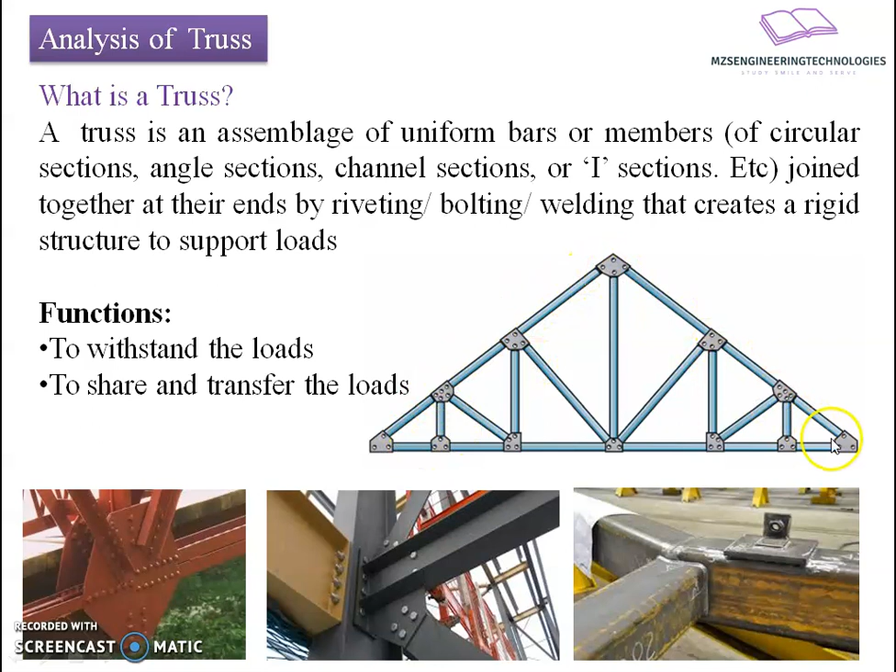Let us find out where we generally find such type of trusses. Such trusses are generally used in case of roofing systems, where we are going to provide a pitch roof for a large span. To cover this large span with the help of flat roofing would become a very heavy structure. To reduce the stresses, we provide pitch elements which have a triangular geometry with various elements.

Performing stress load distribution: we have the bottom chord, then the principal rafter, the vertical member which we call a strut, and inclined members. Sometimes horizontal members are used. This combination is used to dissipate the forces which are coming through the member action over the large span.

These trusses are connected to each other, covering the entire geometry which has to be provided with shelter, and the roof coverings which are provided over it will generate the forces. This force will be the dead force or the wind force which are coming on it. Sometimes live load will also come due to access if provided along the roof.

These trusses are connected to each other with the help of a horizontal member in a transverse direction, thereby providing distribution of the force which comes from the roof system towards the panel points. The junctions of the truss elements are called the panel points, which will receive the loads from the roofing system.

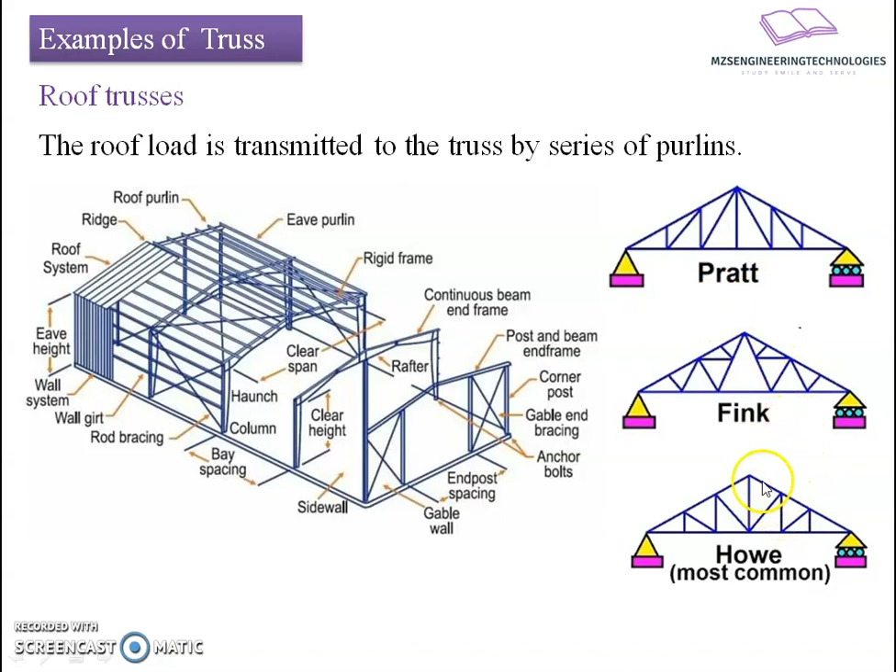The second application of trusses is towards bridges. The load is transmitted by the deck to a series of stringers and then a set of floor beams. In case of bridges, the trusses are used to connect a large span viaduct portion, or overhead portion, or a crossing over the river, or any other obstruction. We are going to provide a spanning in inverted format.

Here the bottom chord will be supporting the deck slab, and this deck slab will be supported by stringers. These stringers are connected at the panel points, and the loads from the deck will be transferred to the stringers, to the floor beam, and floor beam to the truss panel element, or nodal points. This nodal point will then transfer the forces to the various members, and there will be a distribution of forces, thereby making stability of the structure.

These trusses may be used for bridges. It may be used for covering the crossing overheads over the rivers. Sometimes they are used to provide the conduits. Sometimes they are used to prepare a crossing for pipelines, and many more. The example trusses used in bridge structures are Baltimore truss, Pratt truss, and Howe truss.

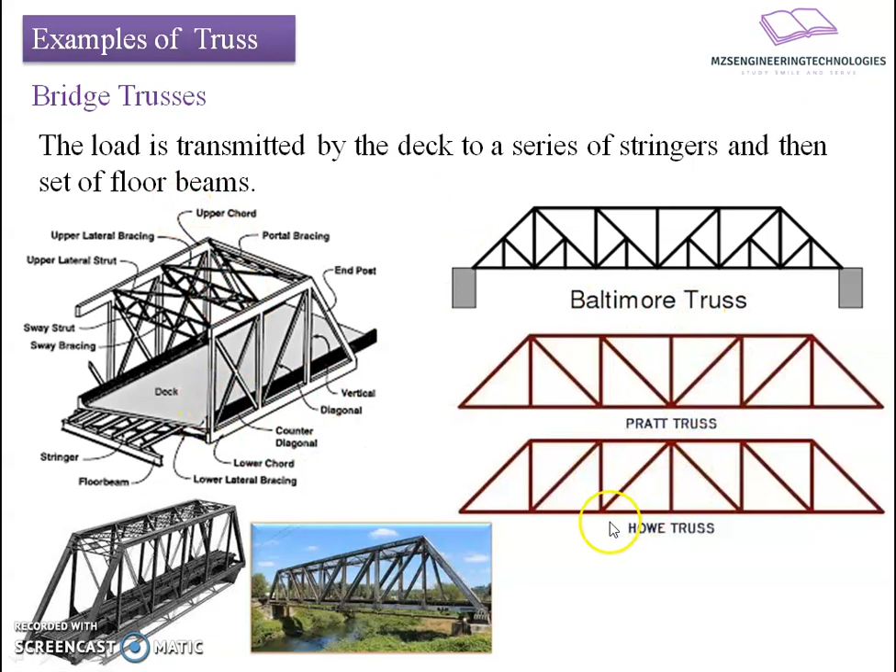Let us try to classify the different types of trusses. Trusses are basically classified into two heads: planar truss and space truss. When the members are within a plane, or the member occupies the space defined by a two-dimensional geometry, I am going to call that a planar truss. When the members are distributed along three dimensions, preparing a three-dimensional structure, we are going to call it a space truss. An example is the electric towers.

If I want to classify the planar trusses further, they are classified as simple truss, compound truss, and complex truss. A simpler geometry defining a simple triangular envelope, thereby creating a skeletal structure, we are going to call a simple truss.

When we use compound elements of triangular geometry covering the area, we are going to call it a compound truss, where one, two, or three triangular groups can be easily identified.

When we have an assemblage which will create a certain nature of complexity in itself, defining n number of loops connected to each other by various end connections or end restraints, then I am going to call it a complex truss.

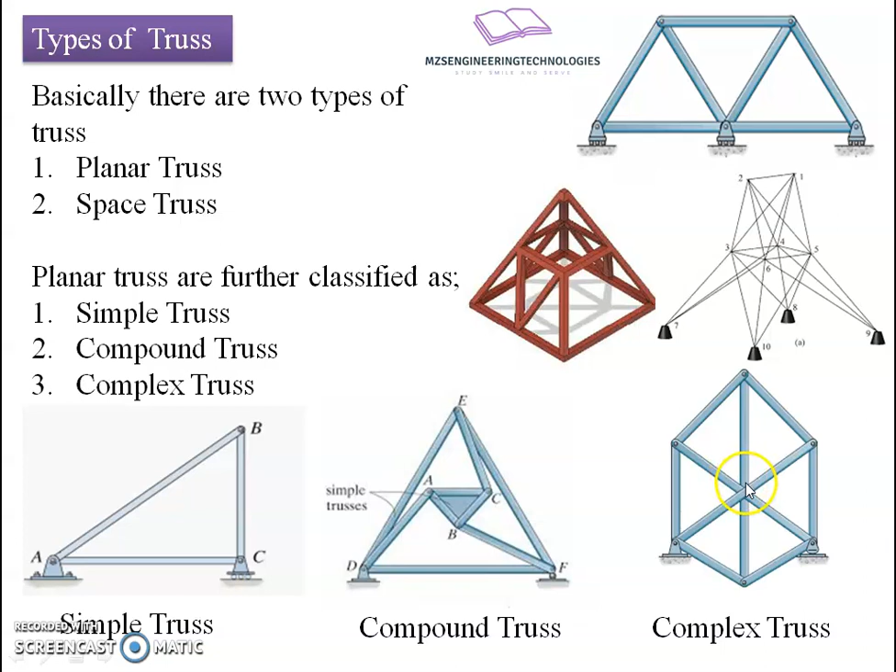The right hand side figure shows that there are n number of loops which have connectivity, defining the loops inside it, but the ends are secured at the outer periphery with the help of pin connections. The crossing or overlapping elements are not defined with any hinge. This leads to a complex geometry, and it is a little bit cumbersome to find out the forces in that particular truss. Such a type of truss is called a complex truss.

Now we'll move towards the basic assumptions used for the analysis of a truss. Before that, we'll talk about what type of connections we generally apply in case of a structure. We provide flexible or pinned connection, semi-rigid connection, or rivet/bolted connection, and rigid or welded connection.

This connection plays an important role to transfer the force from the ends to the member. If flexible connections are there, they will allow translation and rotation. Thereby, the force distribution will only be along the cross-section area of the member, assuring that the forces are axial forces. Whereas in case of semi-rigid connection, they provide resistance against translation or rotation, partial resistance against translation and rotation, thereby introducing additional stresses which are developed due to such a restraint.

In case of rigid connection, this connection will completely clamp down the translation and rotational degrees of freedom for the structure, thereby introducing additional stresses over the member. There may be axial stresses, shear stress, twisting stresses, or bending stresses developed due to twist, or flexural stresses developed due to the flexural forces.

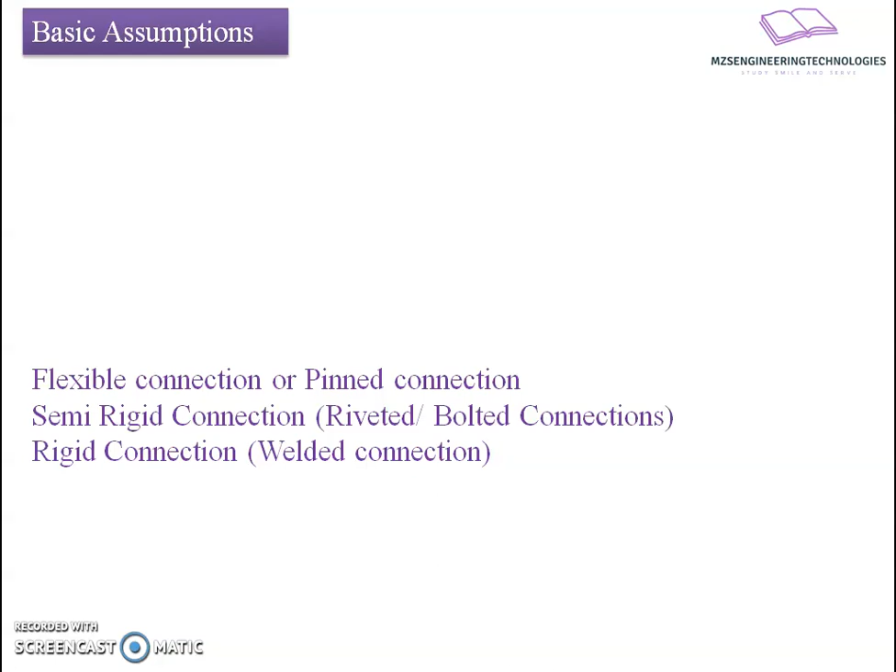In case of truss, the very first assumption is that truss members are connected by smooth pins, so as to ensure that the members are subjected to axial force only. That is the very first assumption.

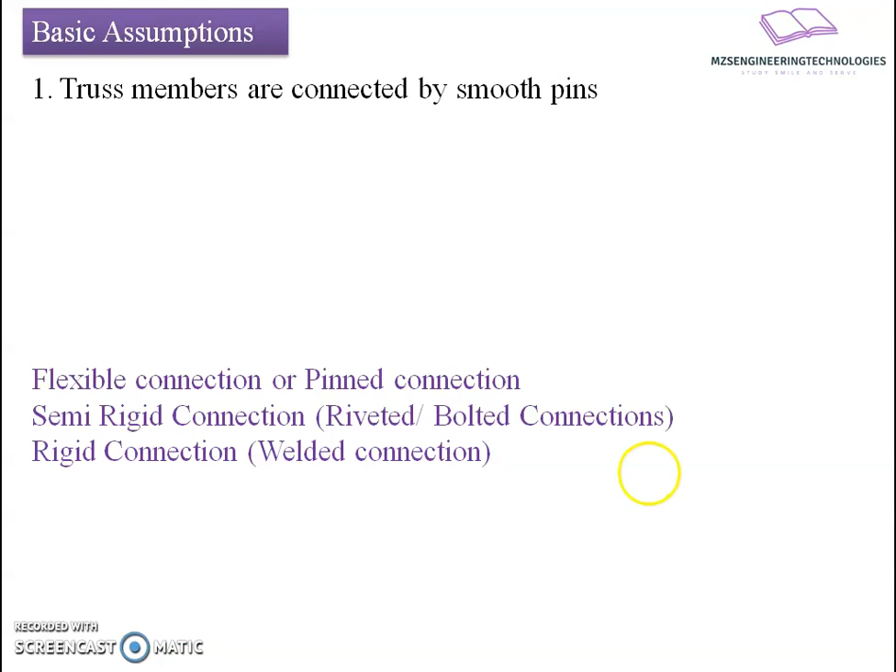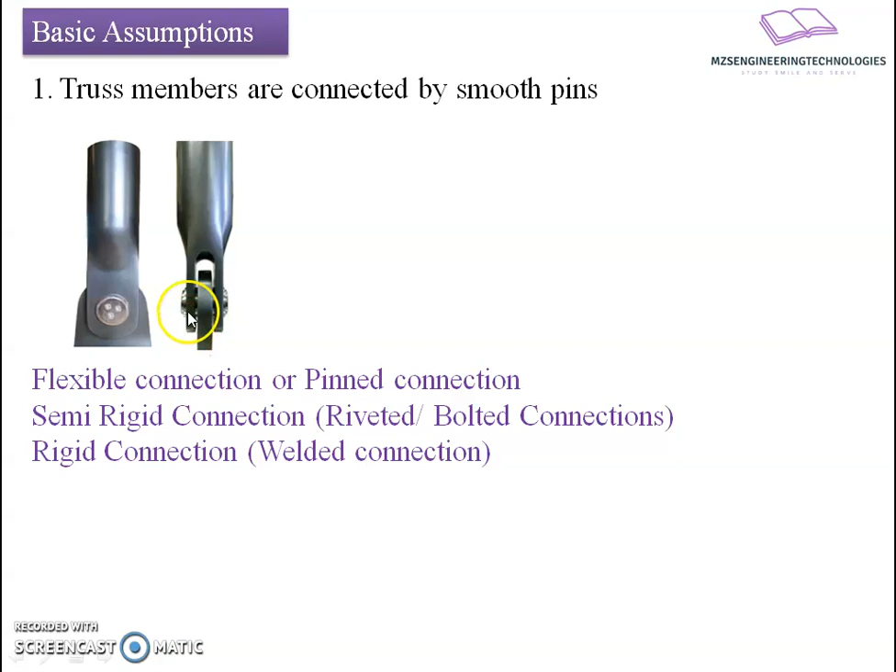What are the pin connections? Let us have a view over it. The pin connections are made with a cylindrical steel metal pin inserted between a connection, which just forms the axis for rotation. It doesn't clamp the moment of the joint. If you see here, the pin is simply inserted between the two elements. This one is the eye end of the member, the second one is the eye end of the connecting plate. Simply the pin is being inserted, and this pin will allow the rotation of the member along its cylindrical axis.

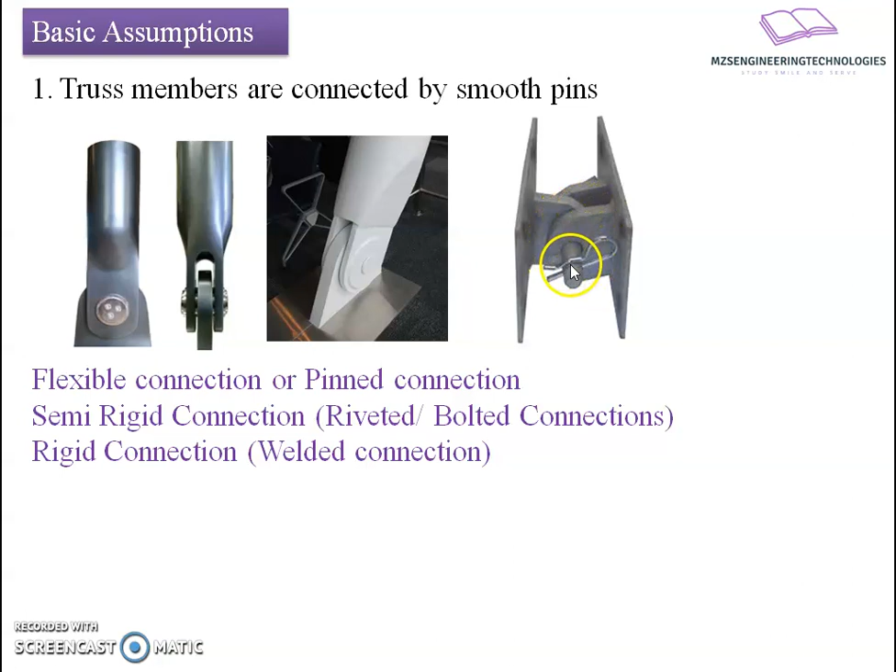If you see the cross section view here, to have conformity that this pin will be secured in the connection, and will not get loosed out or removed, we are going to add a counter locking to this by a pin. This pin will not interfere in the transfer of force, but it will ensure that the pin will not get moved when the connection is in working.

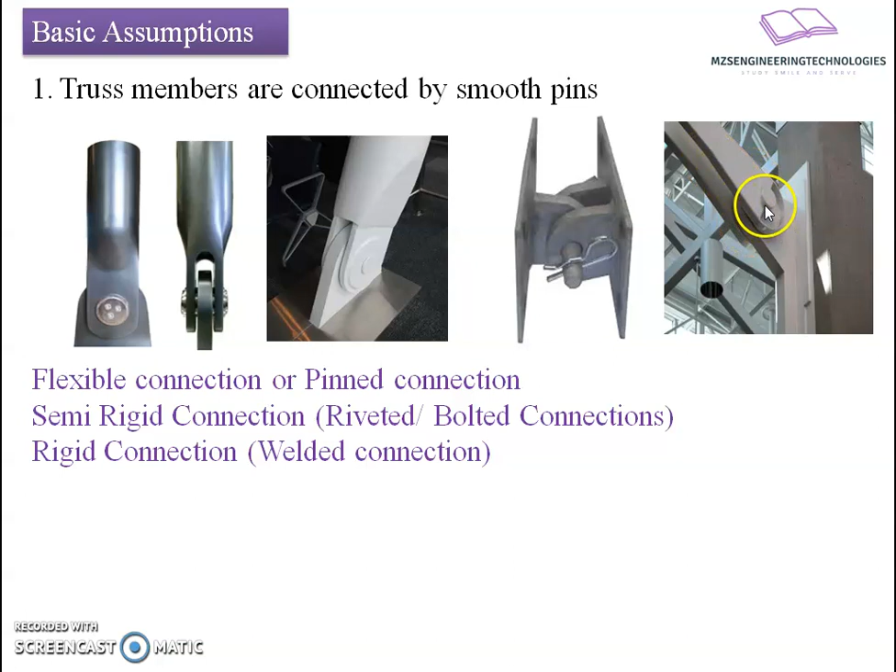This we can see here, the connection made for the actual position of a connection made for a roofing system. Here simply a pin is introduced, which secures that the connection is going to be a flexible one. Now what happens if I provide smooth pins for the connection here? The stresses produced in the element are called primary stresses. These are stresses introduced due to this type of connection.

The assumption is valid for rivet and bolted connections only. Sometimes we can have flexibility with reference to the bolted connection, depending upon what type of clamping force I am going to apply. We have two types of bolted connection here. The first one is the black bolt connection, where we ensure that only the clamping is there and there is no clamping force or resistance developed, like in the case of high friction grip bolts.

In case of welded connections, members are subjected to slight bending moment, producing bending stresses known as secondary stresses. So generally we avoid welded connections in the analysis, or if we consider them, we are going to provide certain provisions related to the bending stresses and their involvement in the analysis of forces.

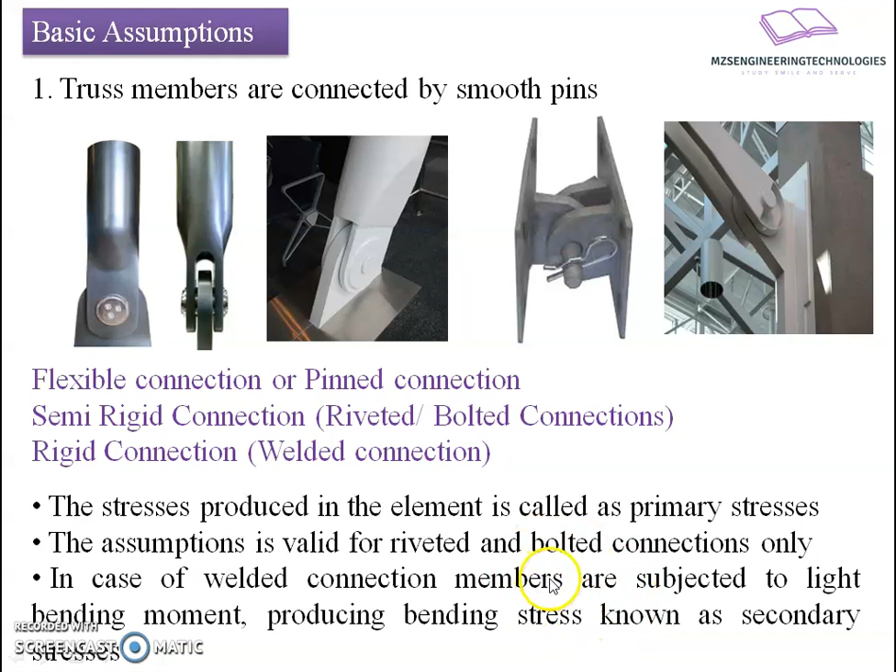Next to that, the members of the trusses are straight members and loads are applied at the joints. Here members are stressed between the two points, and the load carrying capacity depends upon its slenderness. If it has an initial crookedness or slenderness, it will definitely impact the load carrying capacity. Thereby we have to assure that members are straight and the loads are applied at the joints only.

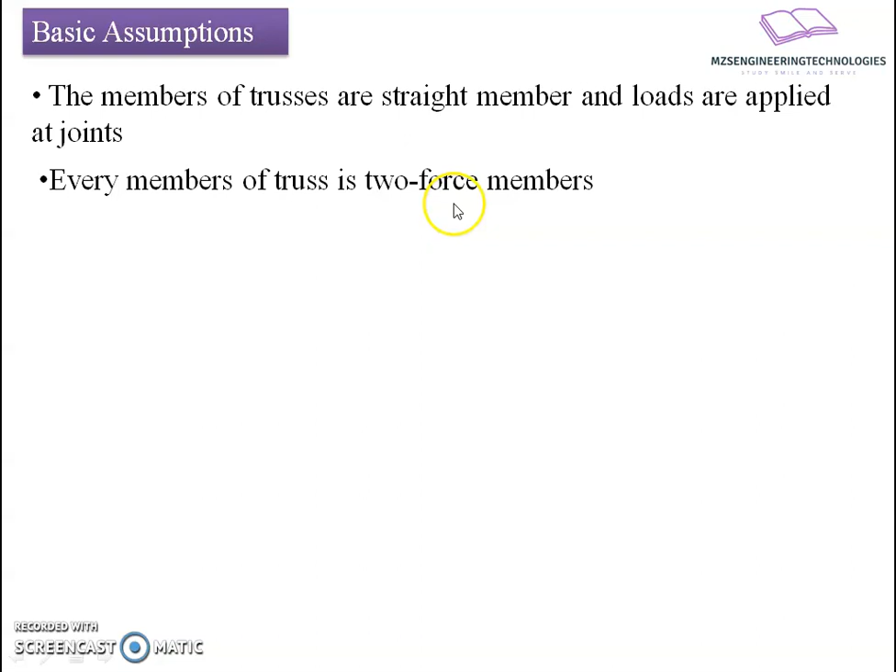Every member of the truss is a two force member. This is a very important one. Two force member means the member of the truss will have a dual action.

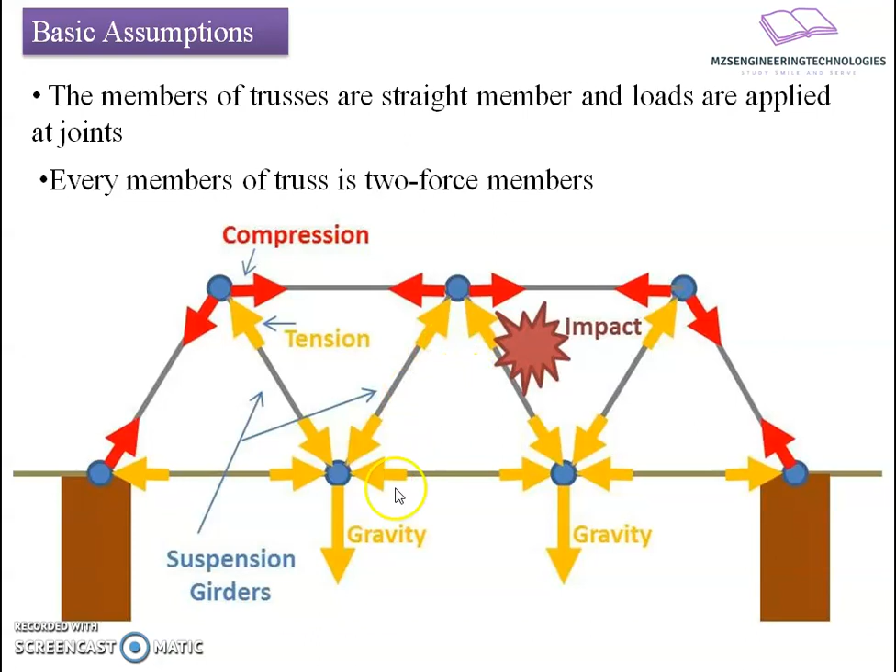For example, if I apply a load at a joint here, let the load be a gravity load, then there will be action among this triangular geometry. It will try to deform this triangular geometry. Some members will be subjected to extension and some to contraction. The members subjected to extension will carry tensile forces. Vice versa, the contracting member will have compressive force developed, either by gravity or by certain impact. So when we say there is a reversal of the force, then they may be subjected to...